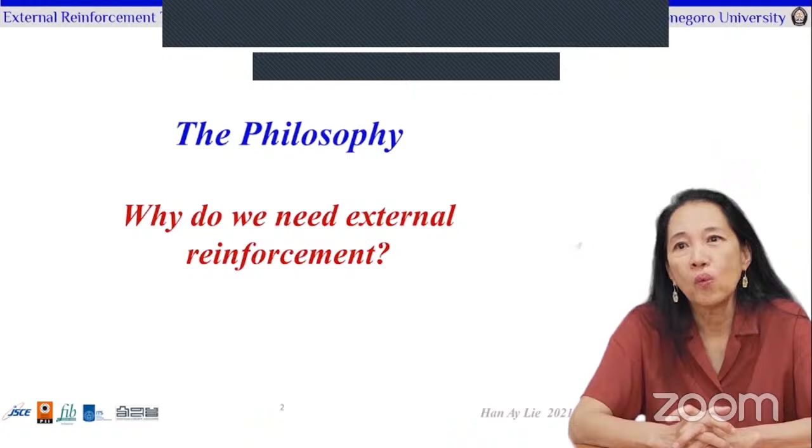External reinforcement techniques using FRP. Let's go to the philosophy first: why do we need external reinforcement?

In 2004, Aceh was hit by a mega tsunami, followed by a series of earthquakes in Java, Lombok, and Gorontalo. The disaster took thousands of lives and resulted in a huge financial loss. This forced us to modify the design criteria in Indonesia.

What is the main idea behind this change? Firstly, it is the increase in the PGA, the peak ground acceleration, due to the zonation of earthquakes in Indonesia. The second is an increase of 80 to 100% in the static equivalent lateral forces applied on a structure. So let's see Surabaya.

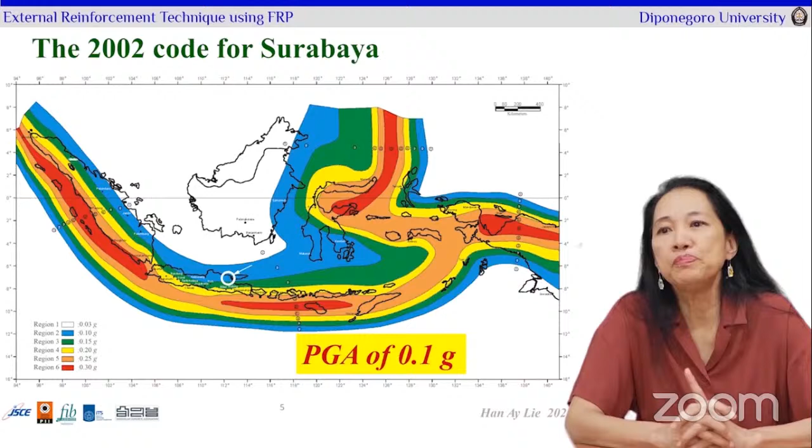Within the circle we have Surabaya according to the code 2002. Here we have a PGA of 0.1 g. Now let's look at the code 2019. Again, Surabaya now has a PGA of 0.4 g. So this increase will substantially change the earthquake force acting on the structure.

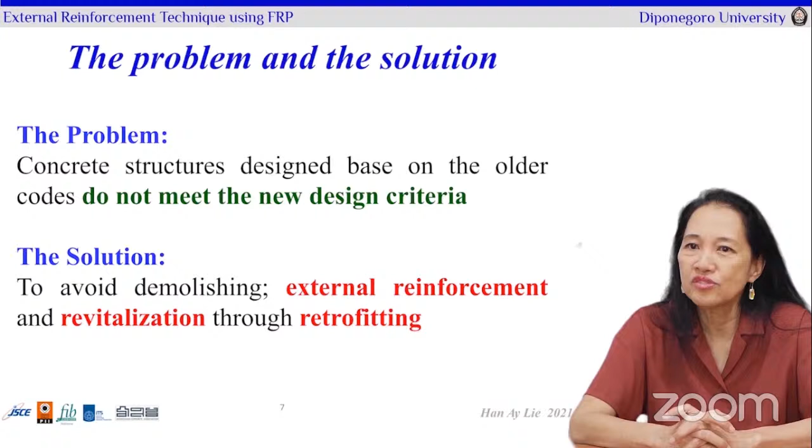So we have a problem. What is our problem? All concrete structures that were designed based on the older codes do not meet the new design criteria anymore. We cannot demolish them all and build new ones. So our solution is: let's do external reinforcement and retrofitting to revitalize structures that have cracked but did not collapse yet.

So this is our action plan. We will increase the capacity of a concrete member with external reinforcement using FRP. External reinforcement can increase the capacity through flexure increase, through shear increase, or by using the concept of confinement of compressive concrete. We can also do retrofitting for cracked but non-collapsed structures.

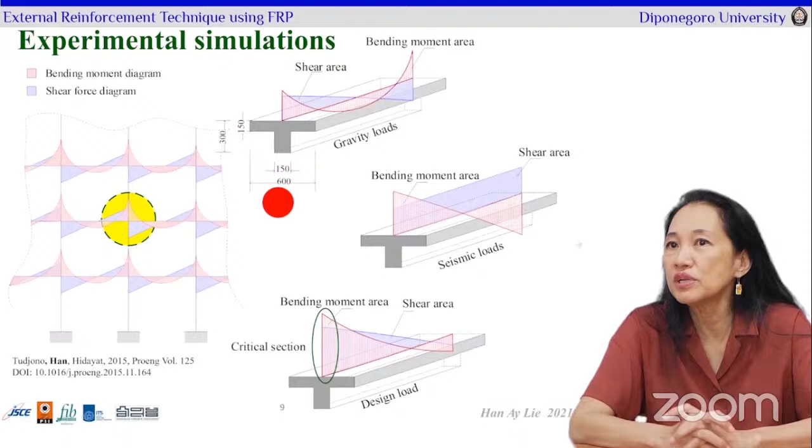So this is the experimental simulation we did in the lab. Let's look at the structure, a typical beam column joint. Here we will have gravity loads acting on the beam, and additionally seismic loads acting on the beam. As a result of these two, we will have a design load that increases due to the increase of the seismic loads. The beam column joint is the area with the largest bending moment and the largest shear forces.

So let's go to the lab. What actually happened we see on the left: we have a beam with the situation of the column, very large moments and very large shear stresses. So what we did in the lab, we put the beam upside down and applied one-point loading at the center, so we still have a very large moment with a very large shear load.

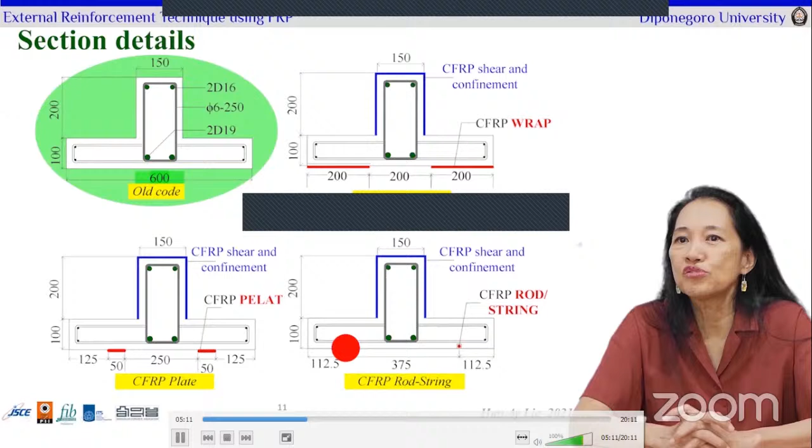These are the section details that we tested at the laboratory. The green one is the beam designed during the old code, with only conventional steel reinforcement. Now we additionally reinforce the structure in flexure, the red ones, which can be wraps, a plate, a rod, or a string. We also did reinforcement for shear around the beam in blue. So this is what we have, and we tested it in the laboratory.

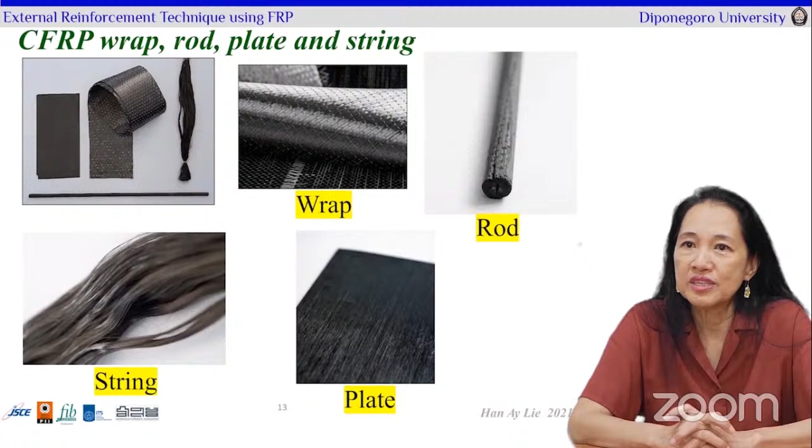Let's look at it further. We have the EBR, externally bonded reinforcement, where the FRP is placed outside the concrete, just attached to the surface. We have NSM, near surface mounted, where we have to cut a hole in the concrete to put in the FRP and close the hole with epoxy. So these are two entirely different systems.

We can see the wrap and the plate are externally bonded outside, but the string and the rod are implanted or embedded into the concrete.

For the pre-impregnated and pultruded system, we call it pre-preg, meaning the fibers were impregnated and pultruded in the factory, but with wet layup, we do it on site. You can see that for the wrap and the string, they were impregnated on site, but for the rod and the plate, it was factory made. That's why they were much stiffer than this wrap and the string when they arrived on site.

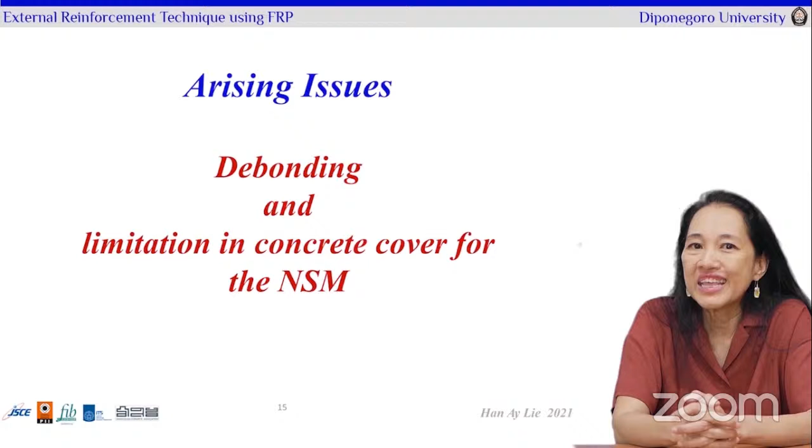So our issues, what do we have? During the test, we saw that debonding occurred. We also had the problem for the NSM that the concrete cover was not thick enough to fulfill the ACI codes. So what would we do about it?

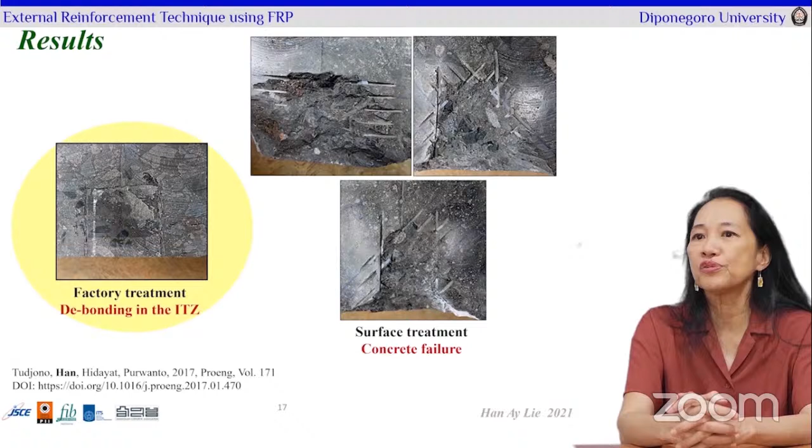For the debonding, we proposed an additional surface treatment by putting grooves in the surface of the concrete, like you can see. We tested 4 types. As a result, the factory treatment resulted in debonding of the ITZ between the FRP and the concrete, but for all our treated surfaces, the concrete failed instead.

I will introduce you to 3 modes of failure that we encountered. The first is denoted with a D, which stands for debonding in the CFRP. R is for rupture of the CFRP, and finally C, which is failure of the concrete. Now let's see the results.

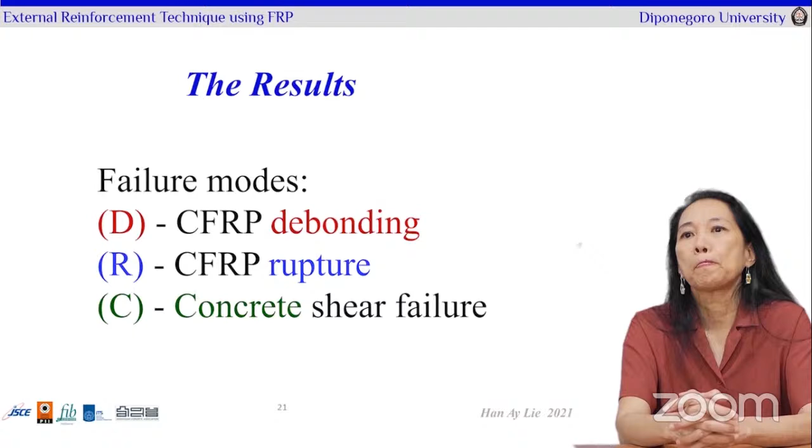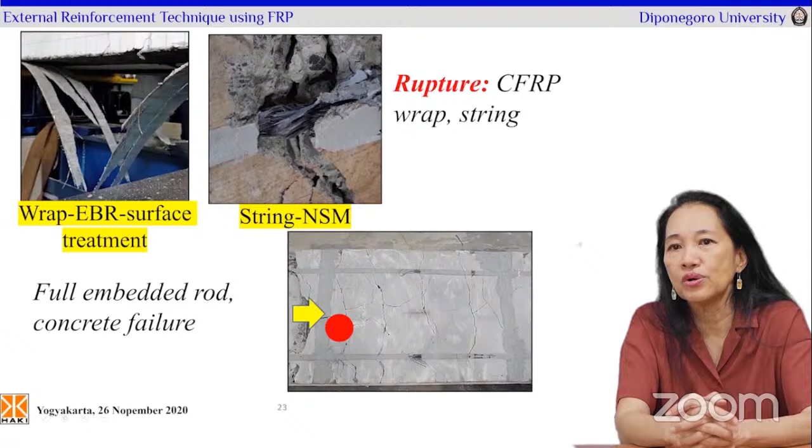For the other samples, we then increased the performance of the surface to increase the bond. Now you can see that the FRP wrap was ruptured. This also happened with the string, you can clearly see it was broken. Only for the rod that was embedded in accordance with the ACI code did we have concrete failure.

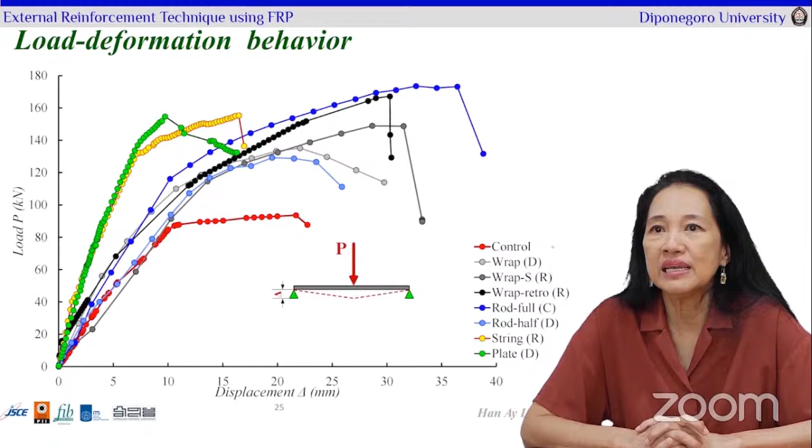These do not look that good, but in reality, something else happened. So I'll show you in the next slide. For the string and the plate, we had stress redistribution. Because we were using 2 strings and 2 plates, they did not fail at the same moment.

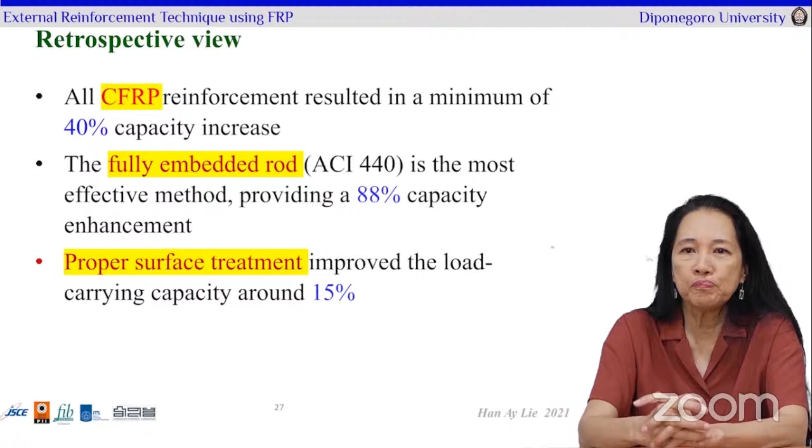So now let's look at the remarks. What can I tell you from our 4-5-year research? All the CFRP reinforcement resulted in a minimum 40% increase in capacity, so it's good. The full embedded rod, according to the 440 ACI, is the best. It almost increased the capacity twice if you compare it to the control element. And also, proper surface treatment will improve the load carrying capacity around 15%.

Further general comments: the rods and the strings require less field preparation. They also produce less dust and less noise disturbance. They also reduce the epoxy use required to attach the rods and the strings to the concrete.

On the other hand, the strings and the wraps are flexible, so we could easily let them follow the trajectory of the member. The NSM method is very sensitive to the embedment depth, and additional surface treatment for the EBR will improve the performance. The ductility criteria needs adjustment since we could see that there was stress redistribution, especially for the plate and the string.

Future research, we're still working on this. We haven't tested the dynamic or the cyclic loading. We haven't tested the loading-unloading protocol. At the time now, this is conducted in cooperation with the NCREE in Taiwan, Tainan.

So this is what I show you. This is an international joint research between many parts, of course, supported by Sika. We have the Atmajaya University in Yogyakarta, the Nihon University in Japan, the UNSOED in Purwokerto, the Diponegoro University, the National United University Taiwan, the Cheng Kung University, and of course the NCREE. So now we are going to test all these beams dynamically and under the loading-unloading protocol.

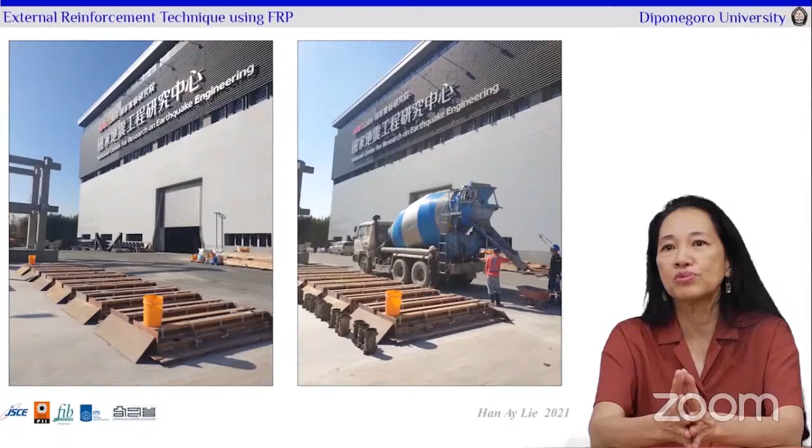And then we can see on the next stage, here is the pouring of the concrete in the cast. Very neatly done. They don't have a protocol anymore, they don't wear masks, all of them. And then finally, you can see here are the members ready for external reinforcement. You can see that the grooves are being made to put in the rods and the strings. This is our team in Taiwan.

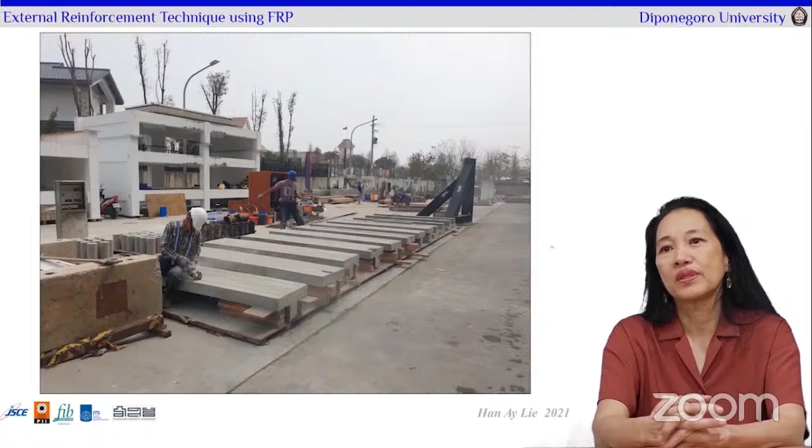Next one: the effect of the anchorage to the confinement is being tested at the Diponegoro University this year. This will be a cooperation between the Diponegoro, the Atmajaya University, the Nihon University in Japan, the Cheng Kung University in Taiwan, and supported by Sika.

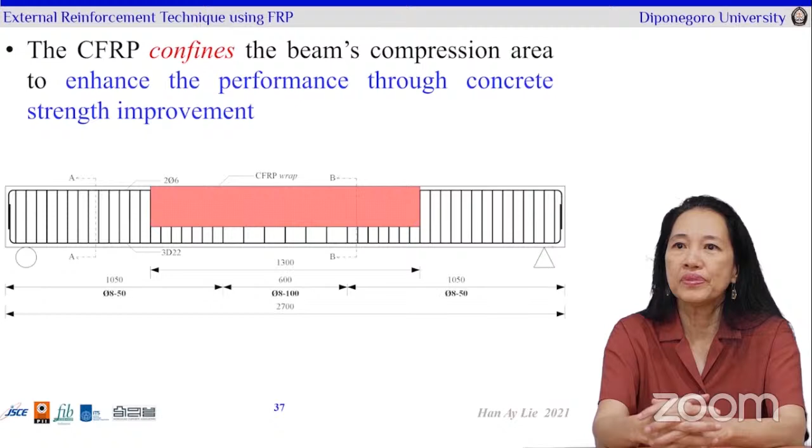So what are we going to do here? We are going to enhance the concrete strength through confinement. So we need an over-reinforced beam. This is still a concept, we're going to do this year. And this is the proposed anchorage method because we found the debonding of the shear reinforcement. We will insert a fan into the concrete.

So the end of the string will be put into the concrete and the outer part will be fan shaped and attached to the FRP using epoxy. This is our first scheme.

The next scheme is that we will do an insertion. So we will cut a hole into the concrete, fold the FRP wrap into the concrete, and fill the hole with epoxy.

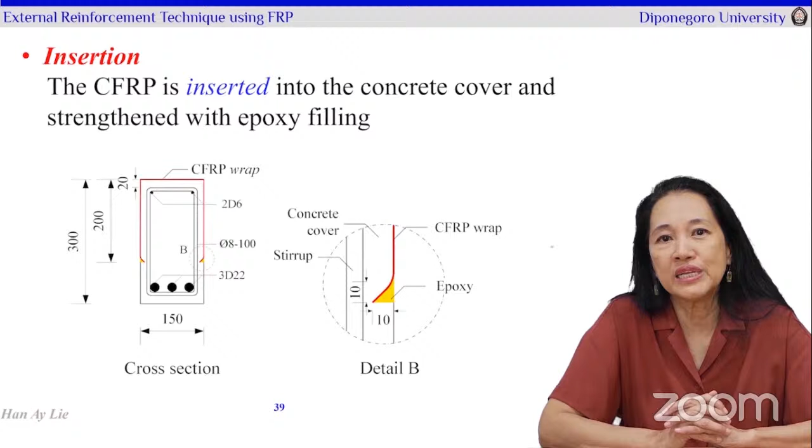So this is what we are going to do this year, hopefully at Diponegoro University as part of a joint research. This is a testing method because now we want to test the confinement. So now we are using a 2-point loading to create a pure bending condition between the 2 points. This is entirely different - we will do a new scheme.

Very cool. So we can do it. We will do it. We will do research despite all those COVID things. Thank you very much for everything.

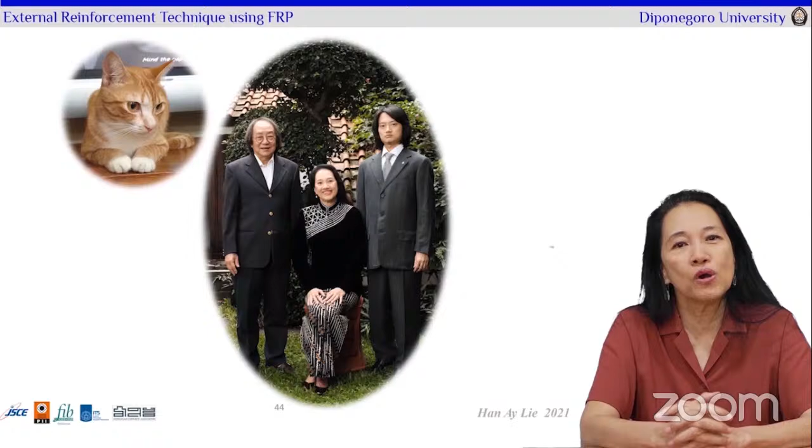And this is my family, my husband and my son who's doing his PhD, and our beloved cat. Thank you very much everybody, and I hope that you enjoy this presentation. Have a good day.

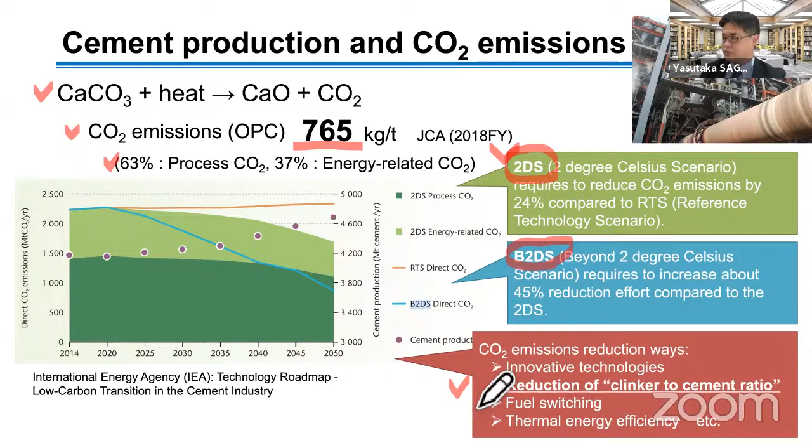JIS standard, the Japanese Industrial Standard, already has specifications for slag cement and fly ash cement. OPC, ordinary Portland cement, can be allowed to mix a small amount of additional materials such as blast furnace slag, siliceous material, fly ash, and limestone. These materials can be mixed at less than 5% for OPC cement.

Slag cement is classified into 3 classes: Class A, B, and C. Class A is replacement ratio from 5% to 30%. Class B is 30 to 60%, and Class C is 60 to 70%. In the same way, fly ash cement is also categorized into 3 classes.

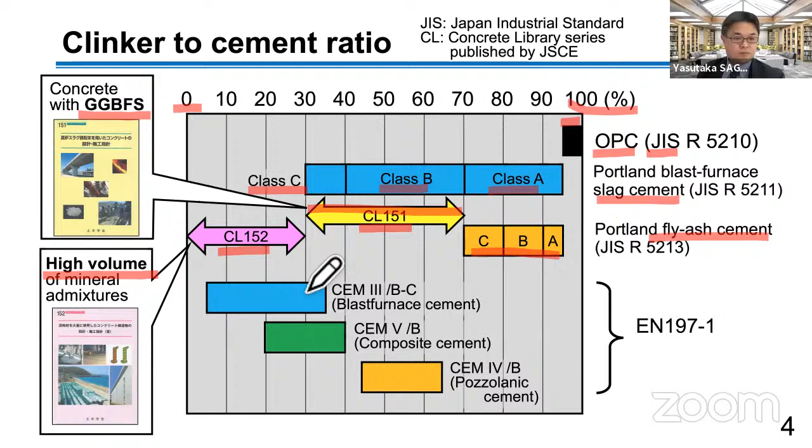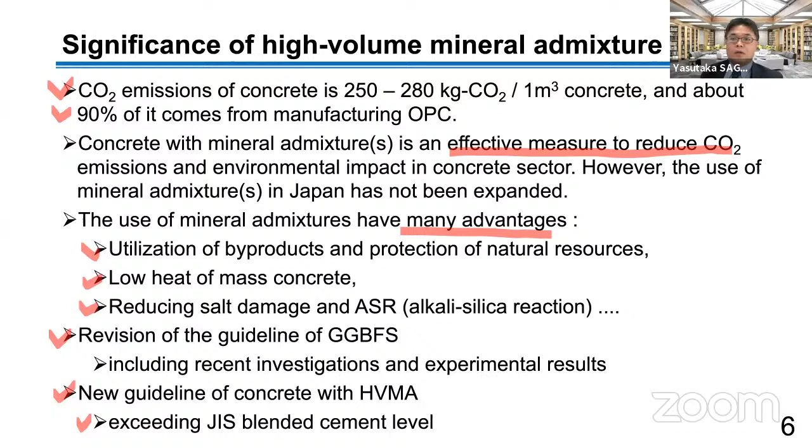I would like to share information about the JIS standard related to blast furnace slag. Molten slag is a byproduct in the steel making process. As you know, blast furnace slag is a byproduct, but it was a very precious material for concrete technology.

When molten slag is rapidly cooled by water jet, granulated blast furnace slag is generated. It is similar to sand. In JIS A 5011 Part 1, slag aggregate is specified, including both slag sand and slag coarse aggregate.

Slag coarse aggregate is produced by a slowly cooled and crushed process. When the granulated blast furnace slag is crushed and ground into fine powder, ground granulated blast furnace slag (GGBFS) is produced. It is very fine powder.

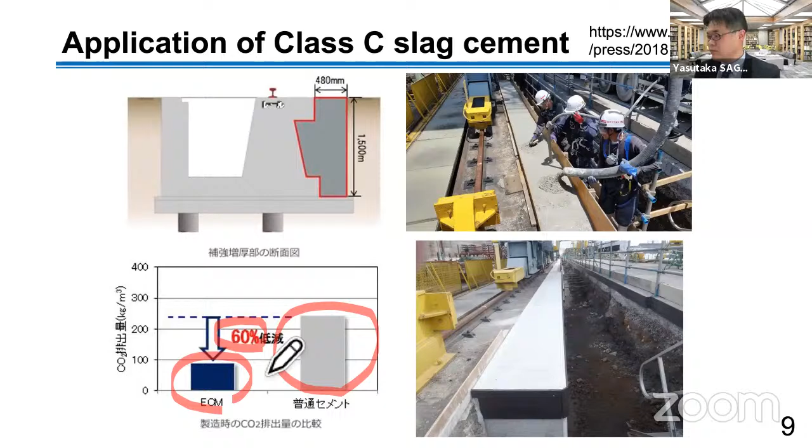The girders consist of several precast segments, transported from the factory to the construction site, and then connected by the post-tension method. It is a two-span bridge, which opened in March 2019.

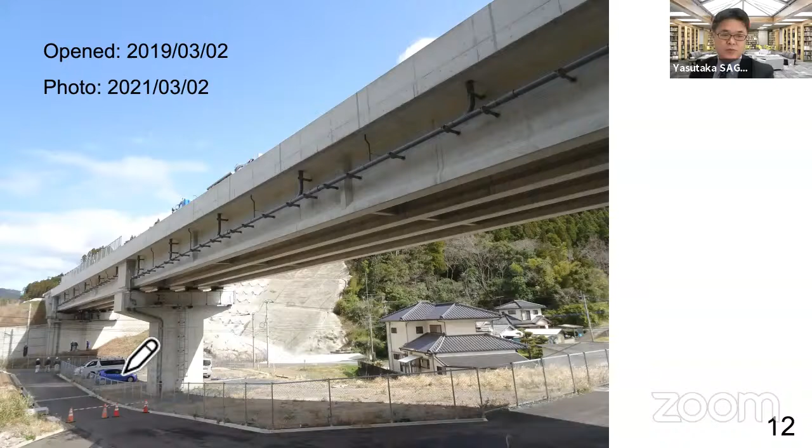Yesterday I just visited this bridge to check the monitoring condition. We continue the monitoring of strains of concrete and temperature.

Okay, the last part of my presentation is concrete library 152, related to high volume mineral admixtures in concrete. In this guideline, the definition...

It is a new guideline, based on collaborative research with PWRI (Public Works Research Institute) and construction companies and related associations during 2011 to 2015. It is based not only on laboratory-based experimental data, but also exposure tests shown in this slide, with many specimens exposed at sites in mild climate, cold and tidal zones, and subtropical and tidal zones, covering many combinations of materials.

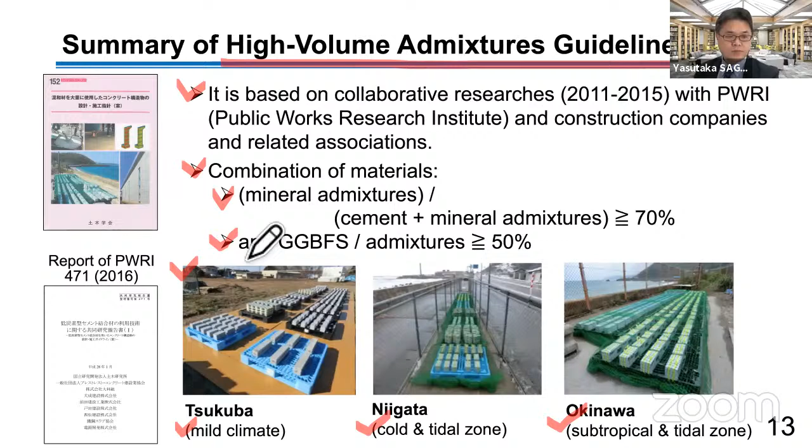In this guideline, mineral admixtures are categorized into blast furnace slag, fly ash, silica fume, and expansive additives, and other materials. Other materials consist of gypsum, slaked lime, and limestone powder. From Portland cement, which is ordinary Portland cement or high early strength Portland cement, to slaked lime — which is calcium hydroxide — all are categorized as binder.

So when you calculate water to binder ratio, W by B, you can include these materials, since they have chemical reactivity in concrete.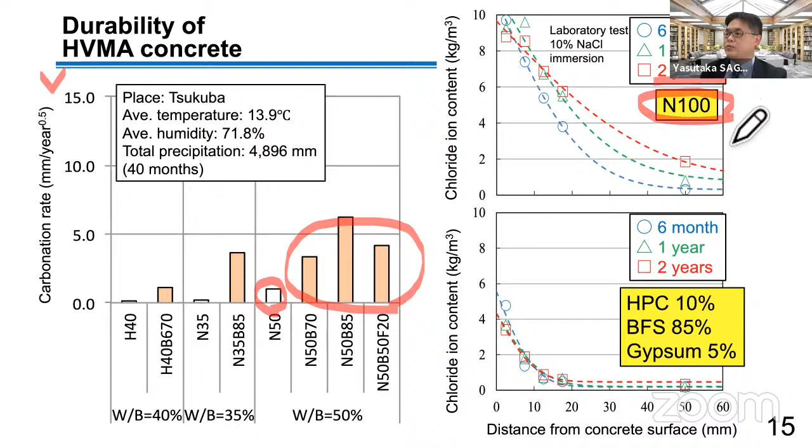The right figures show the result of chloride ingress into concrete from a laboratory immersion test. The test period is until 2 years. The upper graph shows normal Portland cement, and the lower figure shows the result using HPC cement with 85% blast furnace slag and 5% gypsum. In this test, the liquid for immersion is 10% sodium chloride solution.

As you can see, the speed of chloride ingress is smaller for the lower graph. So you can understand that mineral admixture can improve the resistance against chloride ingress and salt damage.

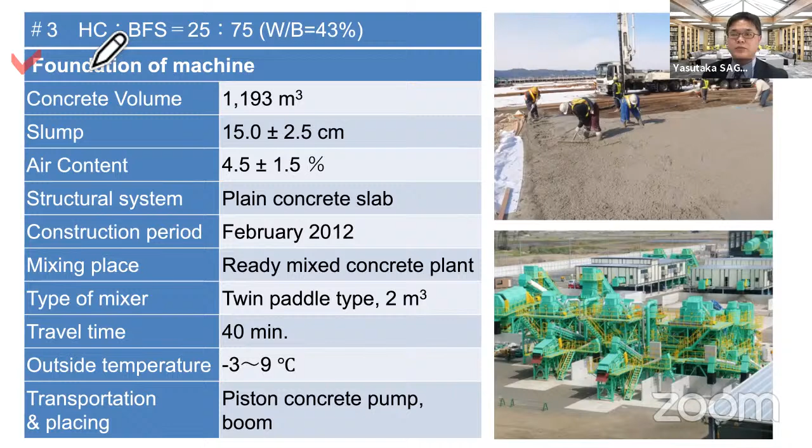Next application is for foundation of a machine. It is a mixture of HPC and BFS. And the next application is a ternary blended binder: HPC, blast furnace slag, and fly ash, at 25%, 45%, and 30% respectively. It is ternary blended.

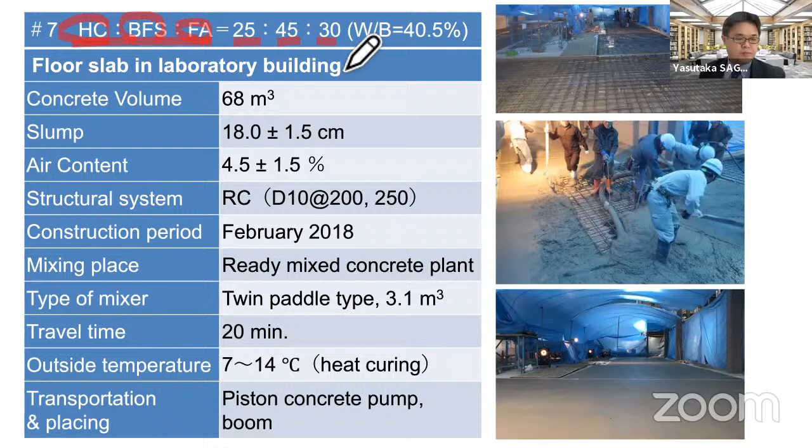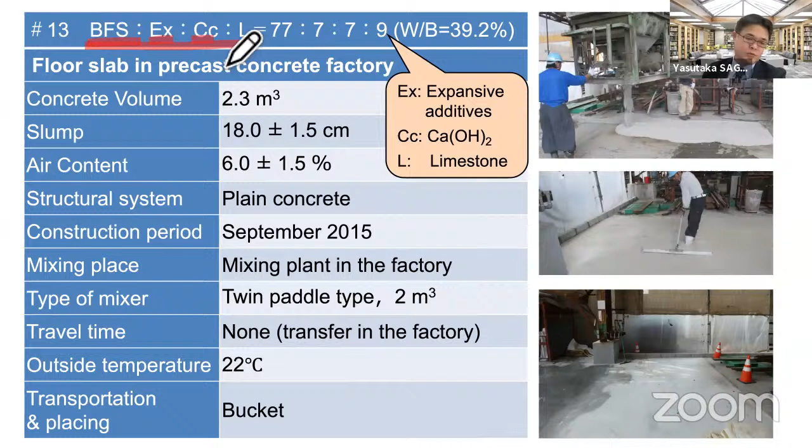The last example is a very challenging case compared to ordinary cement concrete because it is concrete without Portland cement — no Portland cement is used. It consists of 77% blast furnace slag, 7% expansive additives, 7% calcium hydroxide, and 9% limestone powder. Calcium hydroxide acts as an activator of blast furnace slag.

I want to conclude my presentation. Today I talked about the background and motivation for low carbon concrete and recent activities in the JSCE committee. One solution to reduce CO2 emissions from cement is to increase the content of mineral admixture in concrete. We can understand this philosophy.

But there are many obstacles and difficulties, and each country and place has a different material supply chain and different material standards. So what I want to say is that it is very important to work together, to study the advantages and disadvantages of these materials, and to share knowledge and exchange information widely, not only nationwide but also worldwide. I believe that we can solve this big question for sustainable development. That's all for my presentation. Thank you for your kind attention.

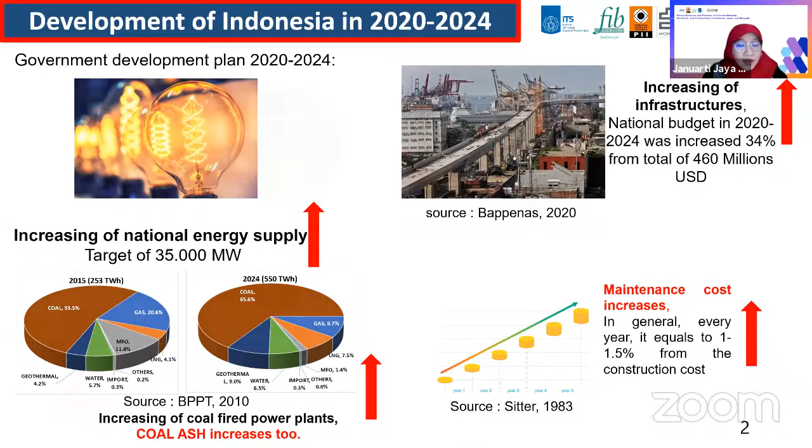So it is not cheap, because every year it costs around 1.5% of the construction cost. We also have another problem, explained by Sagawa Sensei, regarding the environment. As reported in 2018 by the Ministry of Environment and Forestry, the total emission is dominated by changes in land function from cropland to non-cropland, meaning we change the function of the land. We also have problems with peat decomposition and peat fire.

From the energy sector, it also contributes more because of activity from coal-fired power plants. And finally, in the cement sector, cement production contributed more than half of emissions in the industry sector. We can see the increase in cement production is in line with the increase in the national infrastructure plan.

Here we face some problems to be solved. We must decrease emissions and consider environmental problems. In the concrete industry sector, sometimes using river sand is not recommended because of instability of rivers in some places. As we are in a tropical country with a very long coastal line, durability and hot concreting are also additional problems.

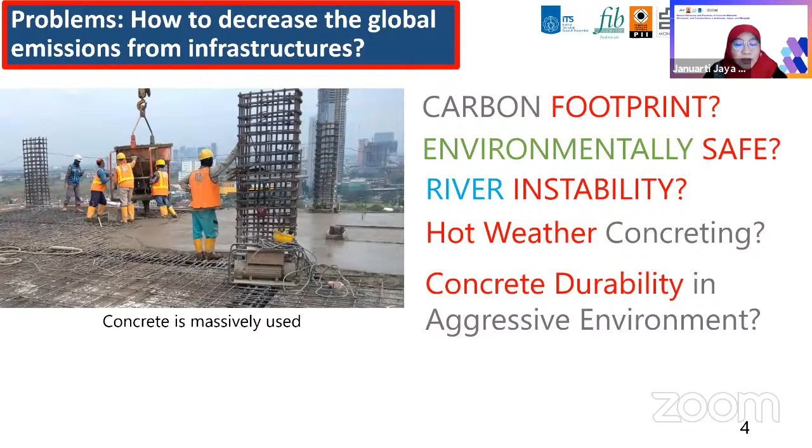Let me show you our experience utilizing fly ash as much as possible to solve this problem. We increased the utilization of fly ash in concrete as a cement replacement, a cement substitution, up to 50% by cement weight.

It is not as much as Sagawa Sensei's explanation before, but we have done our best. Fly ash has a positive and negative effect on concrete. It increases the strength at later age, and also lowers the porosity and decreases the heat of hydration. However, as a pozzolan, it has lower strength at early age, contributes to high shrinkage, and lowers the workability if we use more than 30% by cement weight.

We also use bottom ash as a sand replacement up to 25% to get its property of internal curing in the concrete. But of course it has negative effects on concrete, very similar to fly ash, since we know it is a porous material, so it must contribute to higher shrinkage in the concrete.

Then we have to find the solution, an antidote for this negative effect. So we use microbes in the mixture. In most of our experiments, we use Sporosarcina pasteurii as the bacteria, especially for concrete.

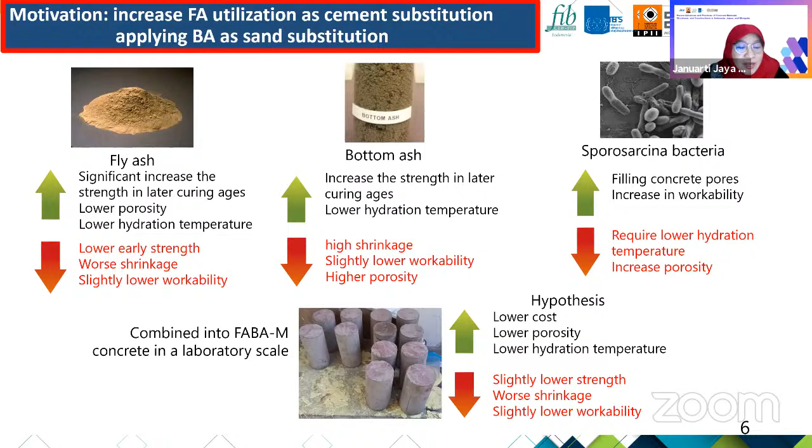So I have to emphasize here the criteria for microbe selection. Obviously we have to use non-pathogenic aerobic bacteria - we don't want to get sick because of this kind of bacteria, so it should be non-pathogenic. And it has to work to fill the pores if oxygen exists.

As concrete contains lime, the pH may be a bit higher, and the microbes have to withstand high alkalinity. So we isolated the bacteria from a lime source, a very local place in East Java.

When we insert the microbes in the concrete, the carbon dioxide from bacteria can react with portlandite. There is also the urease enzyme, which reacts with portlandite to create calcium carbonate. So the calcium carbonate precipitates in the concrete pores, making the concrete denser because it reduces the pores.

Okay, I will go to the next slide. We have found that some local bacteria in Indonesia can be very useful to increase concrete performance.

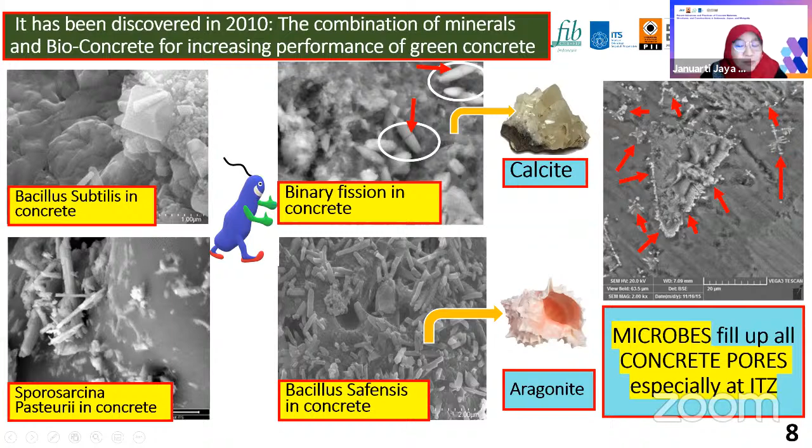We have also made another innovation using sodium hydroxide to increase the pH of concrete. Usually cement contributes to a pH of 12.5 to 13 in concrete mixtures during casting. But using fly ash, bottom ash, and bacteria may decrease the pH in concrete.

So we use a very low concentration of sodium hydroxide, 0.03 molar, introduced during casting as a water substitution. It also increased the reactivity of fly ash.

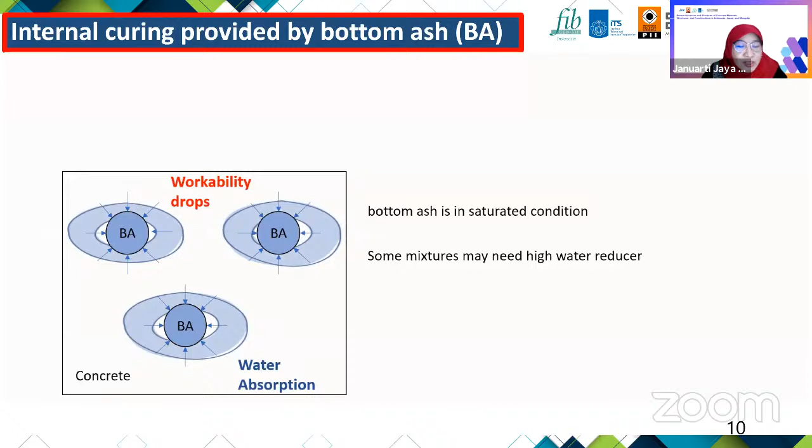And here I have schematic simulations. This is the internal curing effect from bottom ash that we expect to occur during hydration of the concrete. It works like a sponge - it absorbs water at the beginning, lowering the water-to-cement ratio and possibly lowering workability, but then it releases moisture gradually at later ages. This is called internal curing.

So it contributes the moisture to guarantee the next chemical reactions from the pozzolanic reaction and bacterial activity. This is a bit complicated, but I tried my best to make simulations.

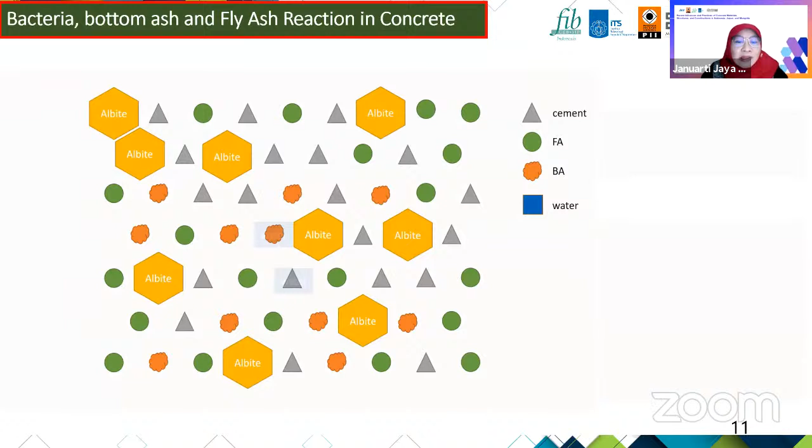This is the schematic of reactions during the first hydration and at later ages of the concrete using bacteria, sodium hydroxide, and coal ash. The bacteria produce CO2 which reacts with portlandite to produce calcite, and the fly ash reacts with portlandite to produce new calcium silicate hydrate. At the end, we have a denser concrete, and the bottom ash continues working to guarantee internal curing inside the concrete during the hardening process.

In the next slide, in our experiment, we used a mix design to obtain the strength of 25 megapascal in 28 days.

As a cement replacement, class F fly ash was used at 40% and 50% by cement weight. Bottom ash was used to replace only 10% of sand by weight, but it's actually quite a high amount.

We made a certain sequence of mixing the materials during the casting. It is very important because it will affect the workability of concrete. We place fly ash first, then mix with sodium hydroxide, then continue with all aggregates, followed by cement and superplasticizer, and also add water containing superplasticizer in the final mixtures, and also we put the bacteria.

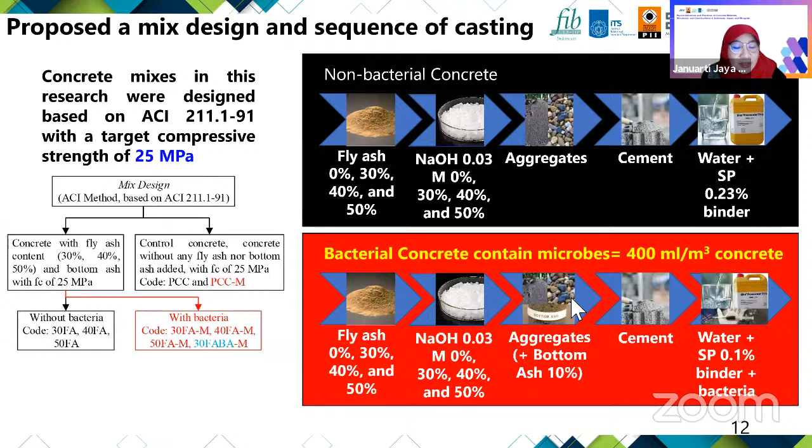We made cylindrical specimens for the strength test and the shrinkage test. We also prepared cubical specimens for monitoring the hydration temperature in 24 hours after casting. In total, we have 272 specimens, and this is the result.

The slump of concrete is something very important to analyze, as the ash content increases, in order to achieve good workability for the slump target of 10 to 14 centimeters. We add water at the end of the mixture as the fly ash content increases. The ash indeed absorbs water during the casting.

As expected, bacteria increase the workability of the mixture. So we can see here, the blue one, the specimen containing 10% of bottom ash.

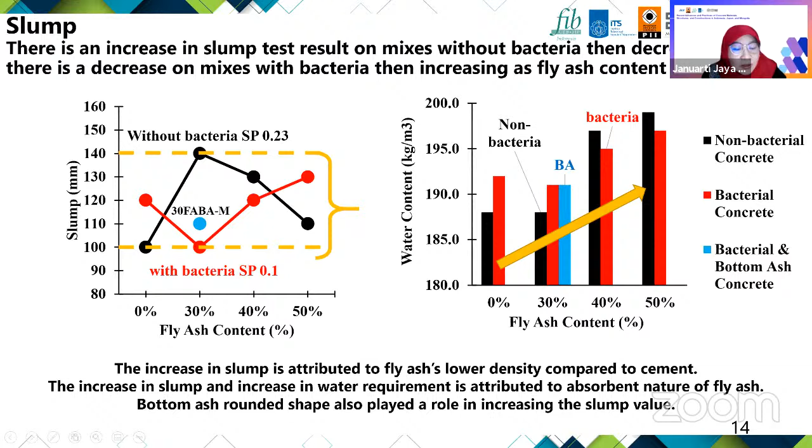Something very interesting to see - I used my previous experiment in Japan at the University of Tokyo to measure the shrinkage of concrete for 10 days. I put an embedded strain gauge in the center of the concrete, and we can monitor the shrinkage during the hydration of the concrete up to 10 days.

This is also very interesting to see: if we do not control the slump, and just keep the water-to-cement ratio constant in our mixtures, we have to guarantee the moist curing up to 10 days.

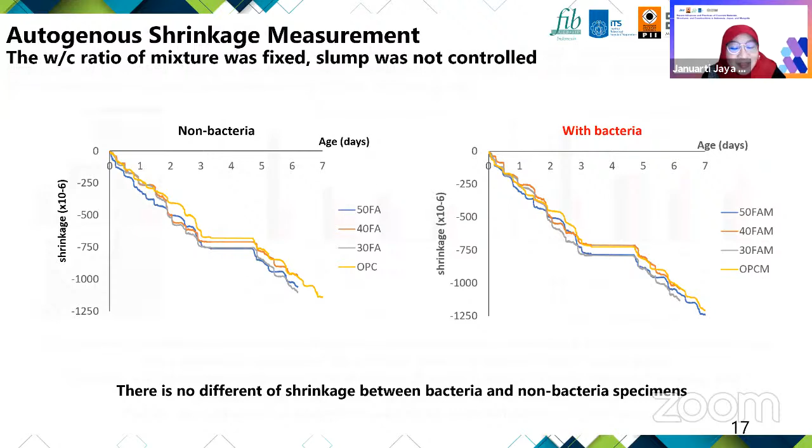For the compressive strength at 28 days, as expected, concrete with higher fly ash content has lower compressive strength. However, at the later age, at 63 days, we found that the increasing rate of strength is higher than the normal specimen. It is very pleasing to see that the effect of internal curing by bottom ash worked very well, along with the effect of bacteria filling the concrete pores during hydration.

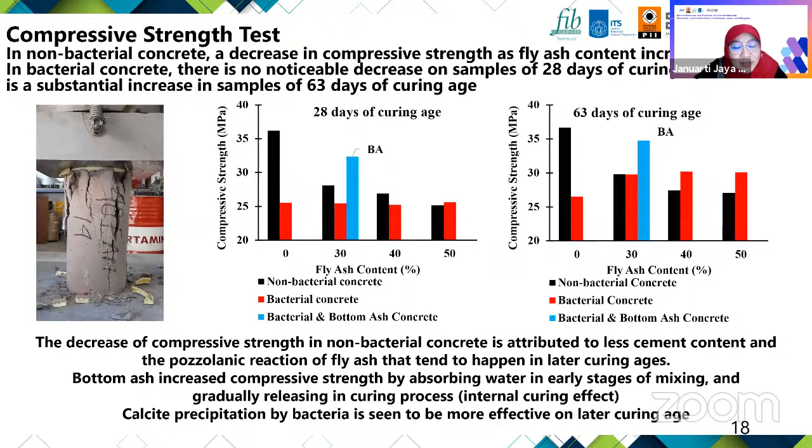Albite, as a product of aluminosilicate, reacts with the reaction product between sodium hydroxide and fly ash; in the early age this increases as fly ash presents in the mixtures. The product of bacteria was also found, as we can see there is calcium carbonate content in the result, especially with the specimen containing bacteria.

On the other hand, we can see there is a slight decrease of portlandite as a product of cement hydration. Why? Because it reacted with bacteria and silicate in fly ash to produce new calcium silicate hydrate and precipitation of calcium carbonate in the concrete pores.

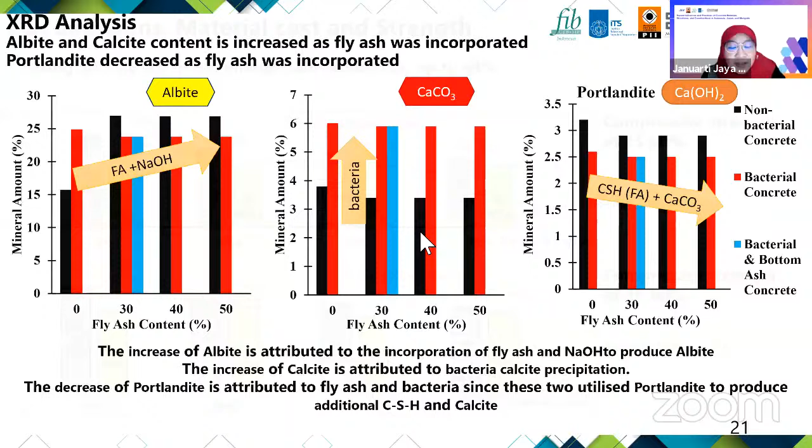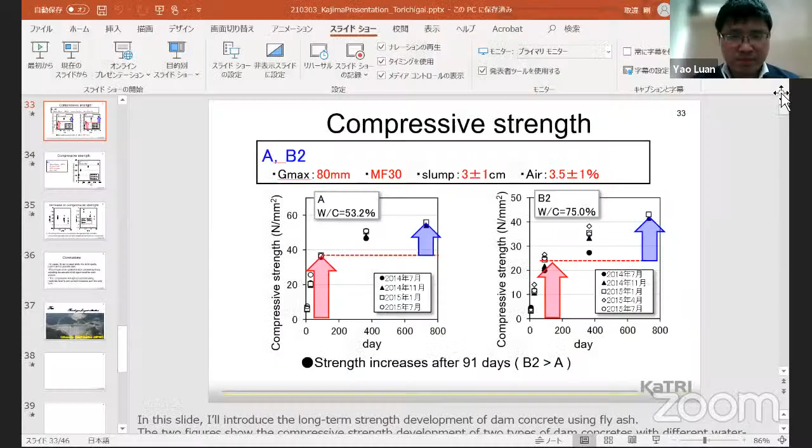Okay, so I can't hear. Can you hear my voice? Yeah, we can hear. Okay, sorry for the delay. My name is Takeshi Torichigai from Kajima Corporation, and I will share my presentation sheet now. Just a moment, please. I'm a little bit nervous because of my poor English and being the final presenter. Sure, no problem, take your time. Just a moment, please. Okay, can you see it? Yes, we can see it, no problem.

Okay, so, Takeshi Torichigai from Kajima Corporation, Japan. I'm a senior research engineer of the research section at Kajima Technical Research Institute, my company's research section. Today I'll talk about this title: application of fly ash cement to concrete structures in Japan, dam construction case. Just a moment, please. I'm glad to get the opportunity to give this presentation. This is an outline of my presentation.

Firstly, let me introduce my company, and next the construction method of concrete dams. Third, how to use fly ash for dam concrete in Japan. And lastly, properties of dam concrete using fly ash.

So firstly, I'd like to make a brief introduction of my company, Kajima Corporation. This slide shows the introduction. The headquarters of my company is in Tokyo, Japan. My company's business fields are civil engineering construction, building construction, real estate development, and design and engineering.

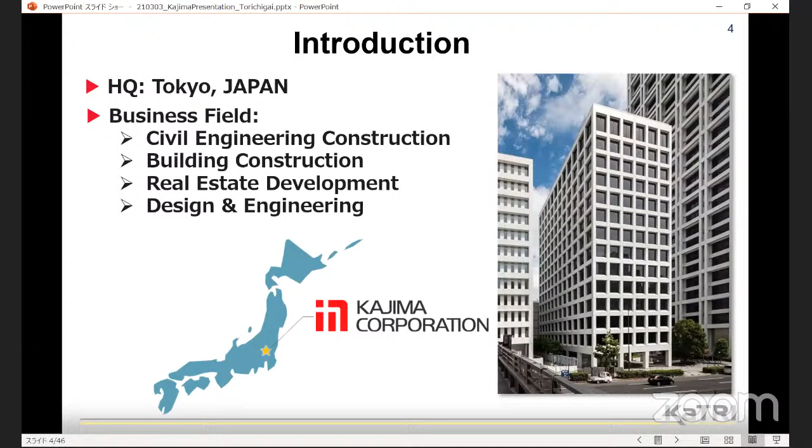This slide shows the history of my company. Kajima was established in 1840.

My company's mission or policy is to lead the industry by constructing Japan's and the world's firsts. The middle photo shows the Kasumigaseki Building, Japan's first skyscraper, and the right side photo shows the Tokyo International Airport, the first hybrid structure.

Next slide shows facts of our company. Paid-in capital is over $814 million. The revenue, which is a little bit old data, is $18.4 billion. Employees number 17,730, including national and international subsidiaries, like this.

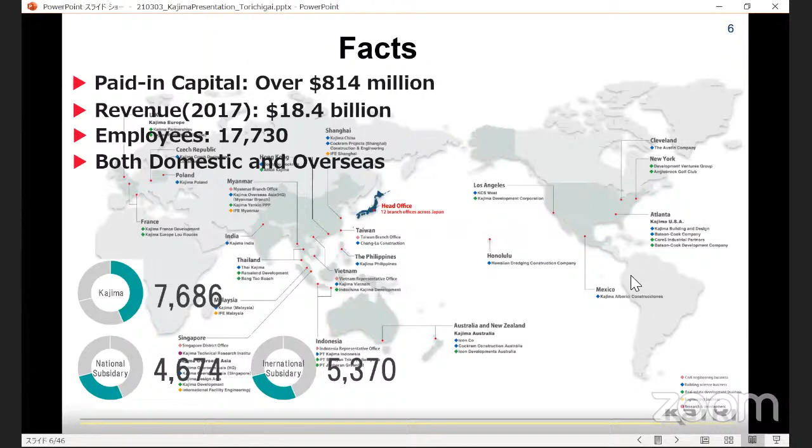I have worked at a dam site as a quality control manager of dam concrete for about 3 years.

Our company covers all phases of the product. Ordinarily contractors are only responsible for construction, I think, but our company is involved in all phases, not only construction but also early planning and design through to maintenance. For example, planning, development, design, engineering, and construction -- that's the main aim of my company -- plus operational management, maintenance, and renewal, for all phases of the projects we've done.

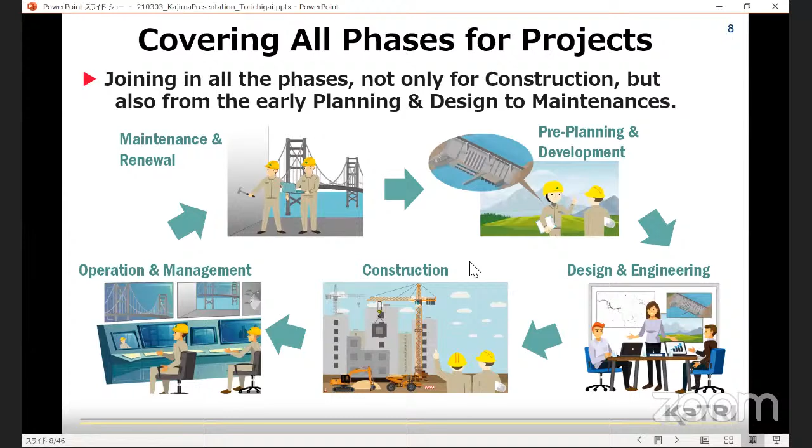Okay, then secondly, I'll talk about the construction method of concrete dams.

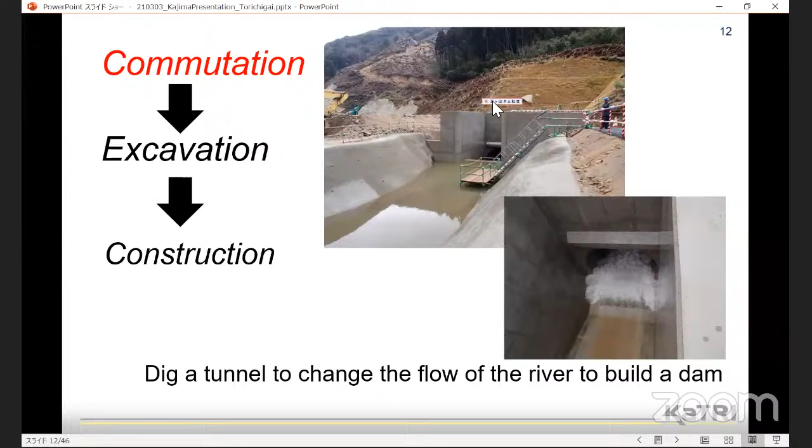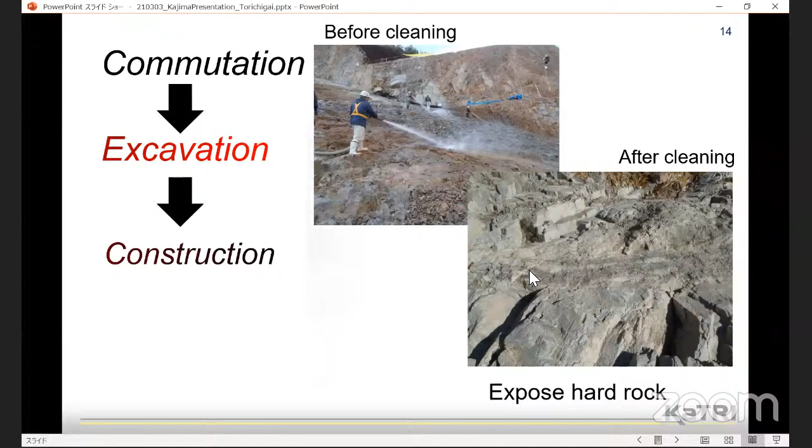After the excavation is completed, the next step is concrete construction.

As for the concrete of the dam, the composition changes depending on the outer part, where the surface is exposed, and the inner part, inside the dam. For the outer part, highly durable concrete is used. For the inner part, concrete is designed to reduce heat generation by reducing the amount of cement used as much as possible, and by using larger gravel, with a maximum gravel size of about 80 millimeters or 150 millimeters.

This slide shows RCD, roller compacted dam concrete. RCD concrete is one of the concrete types used for the inner part of the dam, and it's applied to large size dams.

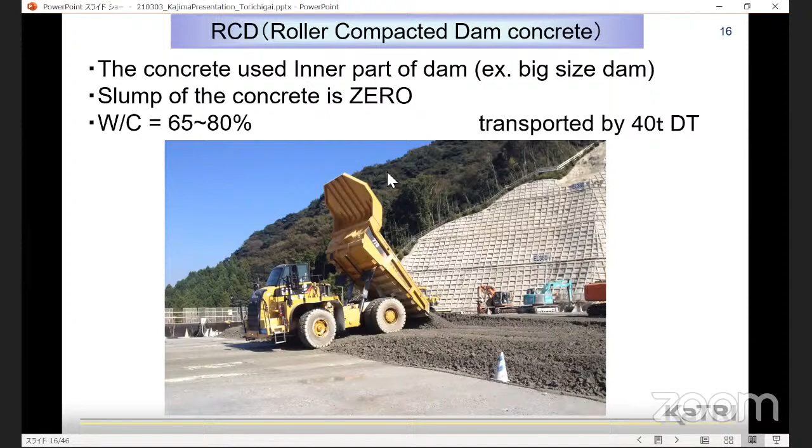The layer thickness of the spread level is determined to be 250 millimeters per layer. By repeating this work 4 times, the RCD concrete reaches 1 meter high.

After laying the RCD with a bulldozer to a height of 1 meter, the next step is to compact it with a vibrating roller. The number of compactions by the vibrating roller is determined by conducting a test in advance. At our site, the number of compactions was 12 per lane.

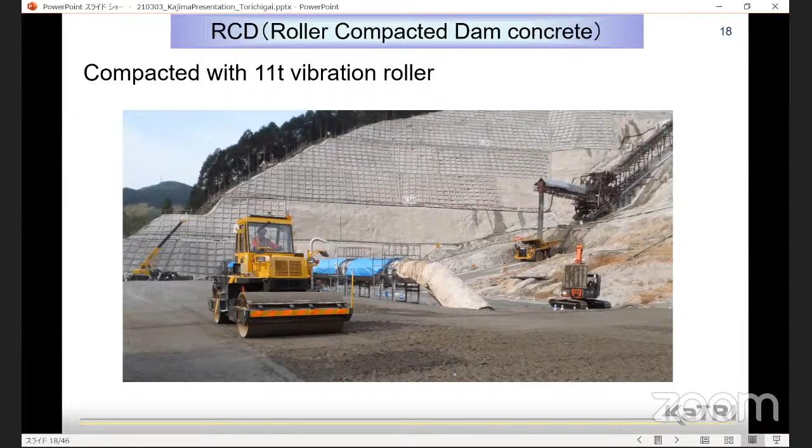Next, I will introduce how fly ash is used in dam concrete in Japan.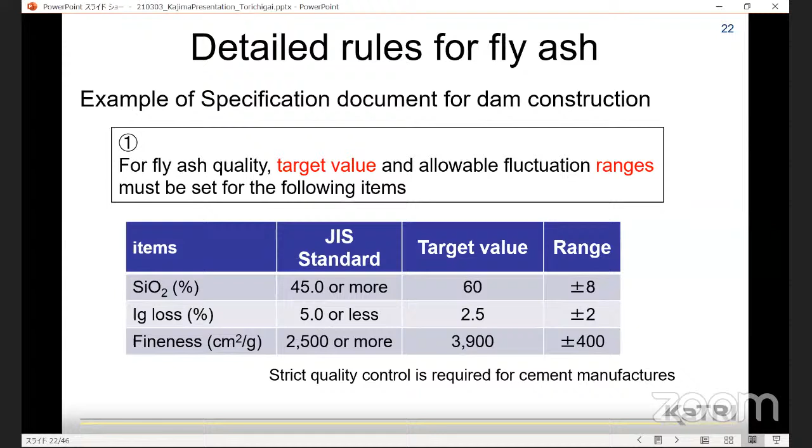First, for fly ash quality, target values and fluctuation ranges must be set for the following items, like SiO2, ignition loss, and fineness. This is the target value of the JIS standard, and at our site the target value and ranges are decided as shown. It is required to set the target value and its width, with stricter regulation than the JIS standard required of us. Therefore, construction companies like ours and cement manufacturers are required to strictly control quality.

In addition, the following was written in the dam construction specification document at my site. Second, contractors should use cement and other mixtures manufactured in the same factory until the dam concrete is completed. But if the amount of fly ash used increases due to the rapid construction of the dam, fly ash from one factory would be insufficient, we think.

Third, the cement can be delivered to the site only after making a pass or fail judgment based on the test result for 28 days compressive strength of cement. Due to the large amount of fly ash used per day, there is no place to store 18 days and 28 days worth of fly ash at the cement plant. In this way, we are trying to strictly control the quality of fly ash better than JIS.

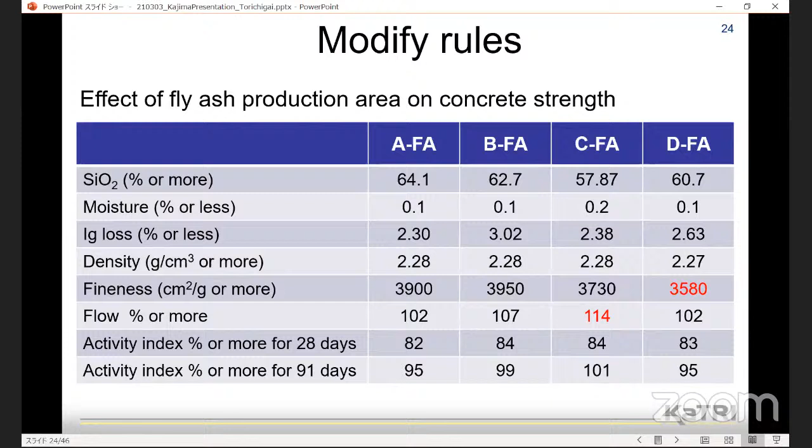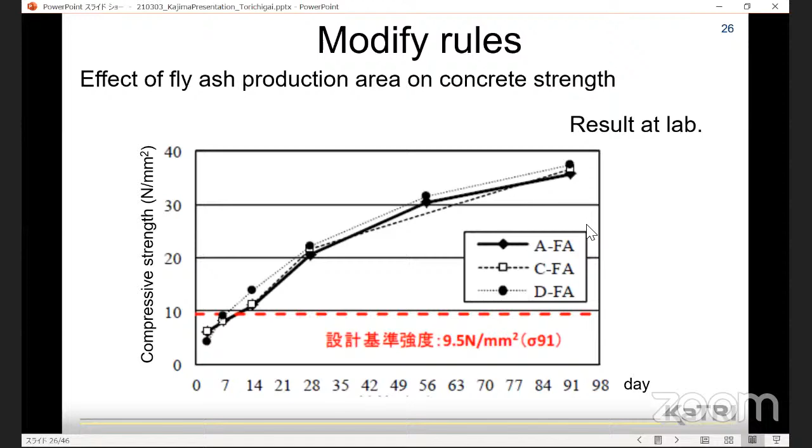So we control every day. We control the quality and fresh property of concrete every day, every hours, changing the AE agent, and we conduct construction of the concrete.

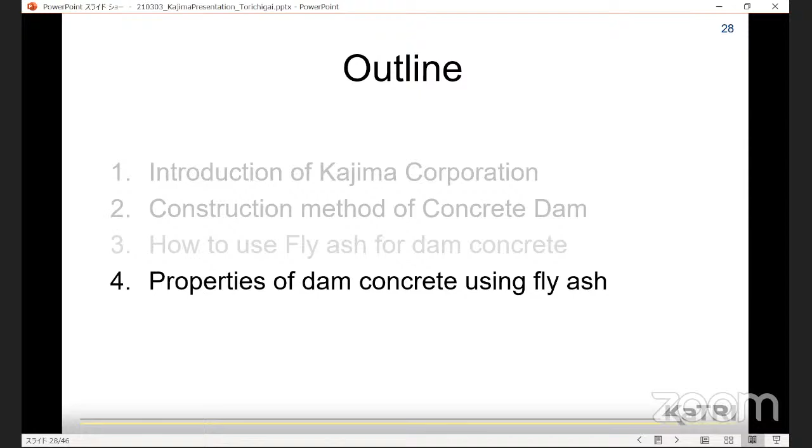Finally, the property of dam concrete using fly ash I will introduce. A mixed proportion of dam concrete has an outer part and inner part. The inner part is divided into two types of concrete: one is RCD and one is slump concrete.

The unit water volume of RCD concrete in the inner part is 101 kilograms per cubic meter. The amount of water in RCD is very, very small, like this. The unit cement amount is 130 kilograms per cubic meter, and the cement is called MF20. M shows moderate heat Portland cement, and F shows fly ash, made by substituting 20% fly ash for moderate heat Portland cement. MF30 uses 30% fly ash. The replacement weight rate of fly ash used for dam concrete is ordinarily 20% or 30% for Japanese dams.

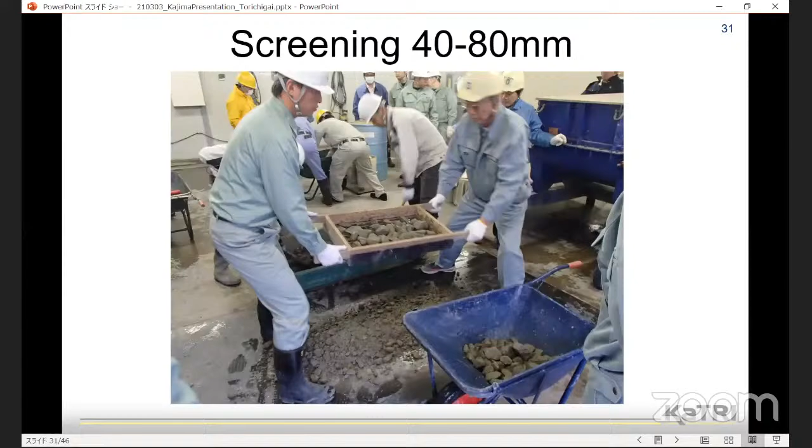The photo shows a situation where coarse aggregate of 40 millimeters or more is being screened. It's very hard work. At the construction site of the concrete dam, this work is done once every 1 to 2 hours for quality control testing of the dam concrete.

This slide shows compressive strength improvement, increasing compressive strength, for A and B2 compositions. The water cement ratio is about 53% and 75%. The maximum size of gravel, type of cement, slump, and air content are the same; only the water cement ratio was changed. Strengths increase after 91 days, and the strength increase is greater for the B2 composition than for A.

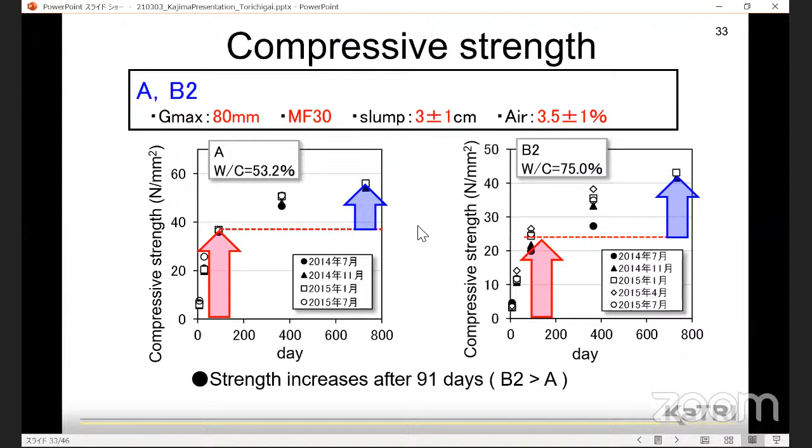Mr. Torichigai, sorry for disturbing. You have 5 minutes. Okay, it's okay. Thank you. Please continue.

Compressive strength increases after 91 days, and then I try to show the relationship between the cement water ratio and the increase in compressive strength for about 1 year and 2 years compared to the 91-day compressive strength. Cement water ratio and the long-term increase of compressive strength have high correlation.

Here, the compressive strength at 2 years is about twice compared to the 91-day compressive strength. Compressive strength of dam concrete using fly ash increases over several years, especially with a low cement water ratio.

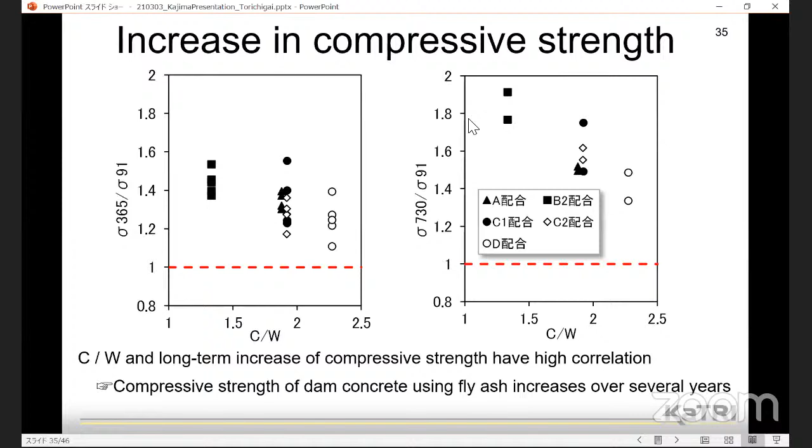That's the conclusion of my presentation. In Japan, fly ash is used under strictly controlled conditions at the concrete dam. The amount of air content is kept constant by finely adjusting the amount of air-entraining agent for each season and each day. The compressive strength of concrete using moderate heat fly ash cement increases over the long term.

That's the end of my presentation. This photo shows the Gokayama Dam. I worked at this site in Fukuoka, Japan. Thank you for your kind attention. Thank you for listening.

Thank you, Mr. Torichigai, very nice presentation. We are very happy to hear about some of the new technology about dam construction using fly ash. I think in Mongolia and also in Indonesia, the need to deal with fly ash is high, so I hope your presentation will help advance that technology in all of these countries. Thank you. Okay, so we would like to proceed to the question and answering session.

I'm glad that we already have a lot of questions, so I could just pick up some of them. Let's go in the order of our speakers. First, the question goes to Professor Han. If FRP is used to repair damaged concrete, how can we control whether the concrete is still under a reinforced condition?

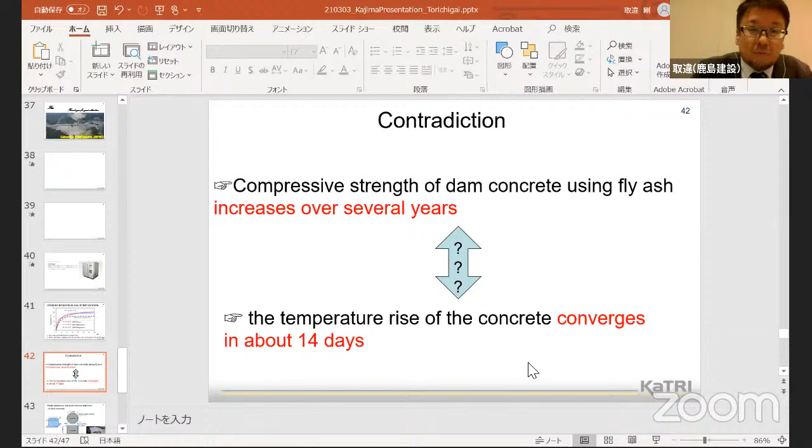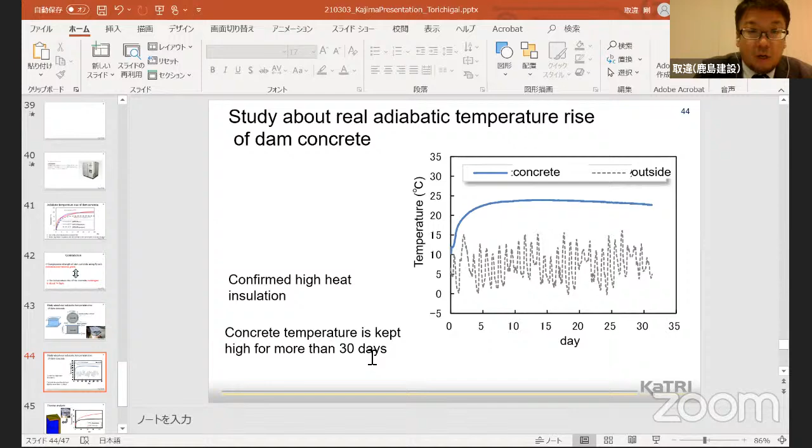So we try to measure the real adiabatic temperature rise of dam concrete using this equipment, where heat insulating material is covered over the concrete, and we measure the heat. That's the result: with confirmed high heat insulation, concrete temperature is kept high for more than 30 days. We try to simulate some analysis to get the real adiabatic temperature rise, and it seems to be this line. So concrete using fly ash may keep generating a little bit of heat in the long term, we think.

Is it okay? Okay. So that means the later age.

So maybe if we do the analysis, compare with analysis, maybe there is more heat increase, later. Yes, okay, that may be very important. Thank you for the answer.

Another question is, you use the AE amount, which changes every day. You said the reason is because of fly ash quality and temperature. So which one is more important for affecting the temperature or quality? I think outside temperature is more effective.

Maybe our friends from Indonesia care more about high temperature, and our friends from Mongolia care more about low temperature. So your data is very helpful for both of them.